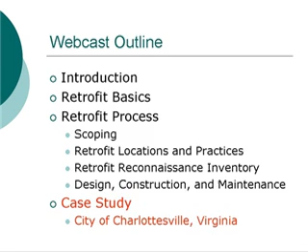It does have some information about pollutant removal performance for different kinds of BMPs, and also some very interesting cost information on how much different BMPs cost on a per-acre basis, so you can make comparisons about costs and benefits of tackling different projects. There's a lot to this manual, and we'll be going through and highlighting some of that for you today.

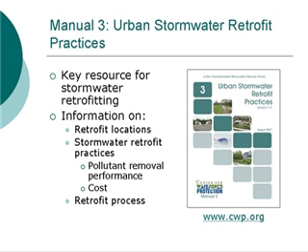You can download it from either of the websites. So one thing before we launch into this, I just wanted to explain in more detail how we see this idea of retrofitting fitting into the post-construction requirement in the Phase 2 stormwater program.

As you know, the Phase 2 program requires MS4s to address stormwater controls on new development and redevelopment, any project that would impact an acre or more of land. On the left you see new development, redevelopment, and then existing development. The regulatory requirements span those first two areas of new development and redevelopment, and of course there is no regulatory requirement for existing development.

The way we in the center look at retrofits, and this is somewhat of a definitional issue, is that we see retrofits spanning both the regulatory side and, if you will, the voluntary side. So retrofits, when we're talking about it today, will be useful in redevelopment situations, which come under the heading of the regulatory program, but will also be useful in existing development.

One of the keys that I think we all need to look at when planning for what we're going to do in an individual MS4 is to really look at what the situations are. Do we have a lot of growth going on? Is it an environment that's already built out? What are the water quality issues? Where are the areas of impervious surface within the watershed? What kind of stormwater controls do we or don't we already have?

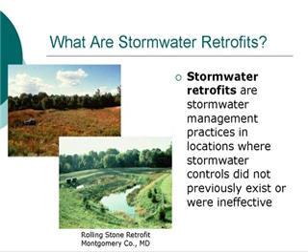So we talked about the definition of a retrofit, and the key question is, why retrofit in the first place? Nikos gave a good introduction to why to undertake retrofitting, to address redevelopment and existing development. But to get a little larger scale, retrofitting is undertaken to address situations where we have ineffective stormwater controls that don't do everything we want them to do - they're not treating water quality, they're not providing channel protection. The great thing about retrofits is they can address those problems caused by ineffective stormwater infrastructure, and help restore a lot of those situations that have occurred because we don't have that infrastructure. We'll talk about a couple of these on the next slides.

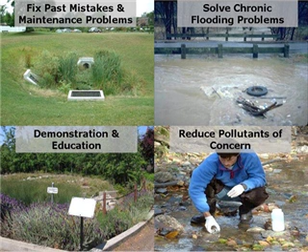Communities have undertaken retrofitting for a number of reasons, primarily to fix past mistakes and maintenance problems. It's a common way to go back and concentrate in particular areas within a municipality or sub-watershed, to find those culverts that might be undersized, stormwater infrastructure that might cause localized flooding, or those chronic BMPs that are a maintenance nightmare.

Communities will also undertake retrofitting to solve chronic flooding problems, tied in with infrastructure, but also addressing particular stream reaches or going into the stream corridor and adding large retrofit practices to retain flood volumes before they pass downstream. Communities like the City of Charlottesville, and Dan's here with us today, have also undertaken retrofitting for demonstration and education reasons, to show the development and redevelopment community how you can use stormwater BMPs on ultra-urban sites and work them in as you're redeveloping sites.

I think a primary one to point out is reducing pollutants of concern. Whether it's to address TMDLs or, here in the Chesapeake Bay area, tributary strategy goals for the Bay, removing things such as nitrogen, phosphorus, and sediment - retrofits can really do a good job at reducing pollutants of concern, both from redevelopment and existing development.

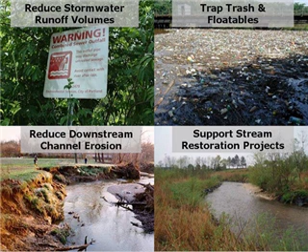We'll move on to a couple other big retrofit reasons, and a nice one to point out is reducing stormwater runoff volumes - both volumes conveyed into the storm drain system, but also into the combined sewer system. Communities like Portland, Oregon, Detroit, Michigan, and Milwaukee, Wisconsin have used stormwater retrofitting through residential downspout disconnection to reduce stormwater runoff volumes into their combined sewer systems and attack those problems.

That's a great point to interject too - EPA sometimes makes rather artificial distinctions between stormwater and CSO cities, but actually many cities have both combined systems and separate systems. A lot of the work we're doing on the landscape really is about the same objective, which is reducing the big volumes of stormwater getting into the system, whether that's a separate system as we focus on, or a combined system that might result in an overflow at some point. But really the work on the land is the same. And that's the great thing about retrofitting - it can help address all of those objectives and problems we have within our watershed.

There's a few others up on your screen. If you're interested in trapping trash and floatables, retrofits can be very effective at doing that. They can also help reduce downstream channel erosion and support stream restoration projects by controlling the hydrology from developed areas upstream of stream restoration corridors.

With all that being said, there's great potential behind stormwater retrofitting, but it's important to point out that it's also challenging and can be expensive. Your required storage volumes or capture volumes, whether for water quality treatment, channel protection, or flood control, can get prohibitively large within developed watersheds, particularly when going after channel protection and flood control. Depending on the amount of development and impervious cover in your watershed, you might need a lot of retrofits - dozens, maybe hundreds - to make a real difference and address those goals. And that's the crux of the problem.

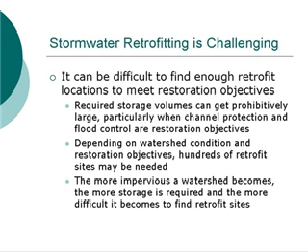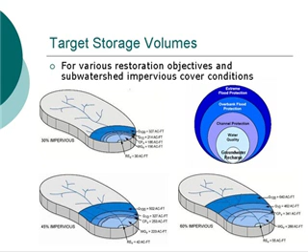What this shows is a simple example, but it shows that as you get more impervious cover within your watershed, it becomes more difficult to retrofit because you have a larger capture volume that you have to capture and treat or otherwise manage. So I think it's an important point that you can go after a lot of these problems within your watersheds, but it can be really difficult to get there.

Continuing on that example, we're looking at that hypothetical watershed where we've got 30% impervious cover, and we're trying to treat the water quality volume. We've had some initial stakeholder meetings, and our watershed was developed without adequate stormwater controls — they don't provide water quality treatment. So we're going to go back in and use retrofitting to capture and treat that water quality volume, setting a reasonable goal of maybe treating 75% of that capture volume, assuming we treat 80% of it with large-scale storage retrofits and 20% with on-site, small-scale retrofits.

You can see on your screen we've got some estimates of how much impervious acreage each of those would treat. Running the numbers, we see that we need about 20 of those big retrofits and over 400 of the small-scale retrofits. So as you can see, that's a lot of retrofits — it can be daunting, but...

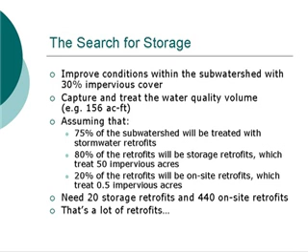Yes, it looks like it could be a very daunting process. But I think the great thing about the retrofit manual and the process we'll talk about today is it lays out a systematic and process-driven approach to identifying and implementing retrofit projects that can address those problems.

And the key is really to use a comprehensive delivery strategy that includes both large-scale and small-scale projects. A lot of stormwater managers make the mistake of thinking that stormwater retrofits involve just those large-scale capital improvement projects. But a comprehensive retrofit program involves not only those, but also some small-scale downspout disconnection type projects, and they can be delivered through a variety of methods, through redevelopment projects, through demonstration and education projects.

There's a lot of different methods that can be used, and the retrofit manual talks about those methods quite a bit. I think one important one to point out is redevelopment — not only on redevelopment sites, but also using stormwater management criteria on redevelopment sites to perhaps trigger other retrofits off-site in a mitigation type approach or a fee-in-lieu program type approach.

Yeah, there can be a whole range of design credits and also, if you will, financial credits, particularly in communities that have stormwater utilities. They can set up the fee structure to give financial credits to homeowners and businesses based on retrofit options, which can spur that kind of change through an incentive program. So, yeah, there's a lot of options for getting this done.

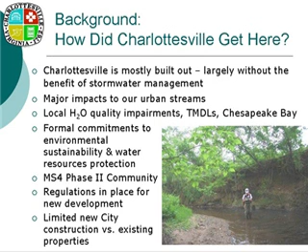Dan, just out of curiosity, what's the source of drinking water for the city of Charlottesville?

We have 2 surface water reservoirs. One is up right in the foothills of the Blue Ridge Mountains, so it's a very pristine source of water, and another is a surface water reservoir where the Rivanna River is impounded. We're going through a very comprehensive water supply process in Charlottesville right now, so those issues are very much on people's minds.

Beyond those historical impacts and our environmental commitments, we do have current regulations in place for new development in the city. For that new development, we're encouraging and incentivizing use of low-impact development and other water quality-based BMPs. When the city has a new construction project, we also pursue those kinds of stormwater management, but really we don't have a lot of new construction that we're actually undertaking.

As a result, we've come to see that the opportunity and importance of installing BMPs as retrofits on existing public lands is going to be the way to address some of these historic impacts, address some of these commitments, address some water quality goals, while at the same time allowing us to demonstrate and promote the types of practices we want to see widely adopted across the city, public and private.

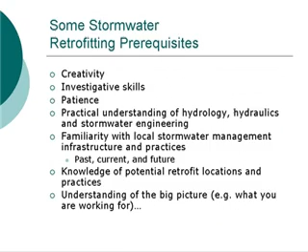Before we dive into the particulars of the process, I want to point out a few prerequisites because retrofitting is a little bit different than designing a new stormwater practice. Instead of working with a clean slate and a nice new greenfield development site, you're going to be working in a heavily developed site with a lot of site constraints. So it's going to require a lot of creativity, investigative skills, patience, and also the technical knowledge about hydrology and hydraulics and stormwater engineering, local stormwater management practices that have been used, knowledge of potential retrofit locations, and an understanding of the big picture.

And I think this is something we should never lose sight of when we undertake any of these efforts. The City of Charlottesville had a great focus for their retrofit study, but whether it's a nice wooded riparian stream corridor, an estuary, a coastal marshland, or a drinking water reservoir, you've got to keep in mind what you're actually working for and the goals you're trying to meet with retrofitting.

So without further ado, we'll dive into step 1 of the process, which is retrofit scoping. I pointed out at the end of Dan's presentation that giving your retrofit program a specific focus and purpose is extremely important. So we'll spend a lot of time on this step this morning, and through retrofit scoping, you're defining that strategy that's going to meet the goals you want to meet in your watershed and really tackle those problems.

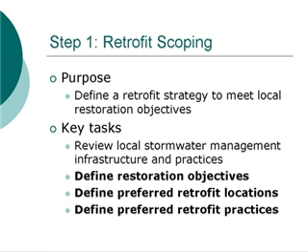There's a few key tasks that are involved. I'm not going to spend time on that first one on your screen, but the last three we're going to talk about in more detail this morning.

First of those tasks is defining your restoration objectives. Again, this is tying your retrofitting into what you're actually working for, answering and solving the problems you're actually trying to address. We have some nice example stormwater retrofitting objectives on the screen, but the key point here is to tie your larger big picture restoration objectives, like reducing pollutants of concern that might be conveyed into a bay or drinking water reservoir, into a specific and measurable retrofitting goal.

So we have a few examples here on the screen of how you could tie big picture restoration objectives into some retrofitting actions. The key is to translate those big picture goals into more specific, measurable goals, and to make sure those goals are realistic as well.

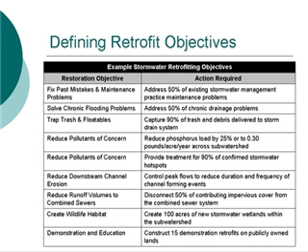Now, everybody noticed you said measurable goals. Very good, Mike, that's right. Yeah, so setting some bars to hit, and not setting them too high that you can't ever jump over them, but giving a real purpose to your retrofitting study.

And I think, while it's nice to look at these hypothetical examples, we should take a good look at what the City of Charlottesville did in defining their retrofit goals and scoping their program out.

Sure, we'll talk about that a little bit more. We talked earlier about the overall objectives of the study that were developed when the idea was hatched, but early in the process, we also came up with some performance goals for the retrofits we'd be searching for, generally like the ones Mike had on his last slide. We really took care to ensure that the specific retrofit performance goals were complementary to and would help achieve the overall study objectives.

The primary goals include pollutant removal, and we chose to focus on local and regional pollutants of concern. Sedimentation has been identified as one of the greatest threats to the health of the Rivanna River watershed where Charlottesville is, and several of our local streams have TMDLs for bacteria. So those were certainly pollutants we were interested in seeing these retrofits address.

Nitrogen and phosphorus are two of the major nutrients being targeted for reductions in Chesapeake Bay restoration efforts, so those are also ones we wanted to look at. For runoff reduction, we wanted retrofits that could achieve overall reductions in stormwater volume, which helps address downstream channel erosion issues, which then gets to your sedimentation problem. So we're trying to look at these things in the context of our local water quality goals and issues.

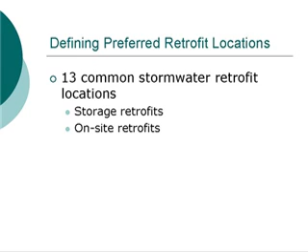So when we talk about storage, we're not trying to imply big ponds only. That might be one of your options, but infiltration into the ground is also a storage option, and we'll talk about a range of those things. So hopefully nobody's confused. We're always trying to find the right terminology and the right way to say things, and sometimes there's a little bit of a force fit with some of these words.

It's true, and again, we're at almost Nikos' favorite diagram. This one only has 6 balls. Changed, that's true, so 6? Yeah, there's a fair amount of graphics effort to produce this one.

So storage retrofits are basically retrofits that capture a large drainage area. These are our big site retrofits, typically capturing on the order of 5 to 500 acres. They typically can address both quality and quantity, channel protection types of criteria. Usually they would be located on public lands.

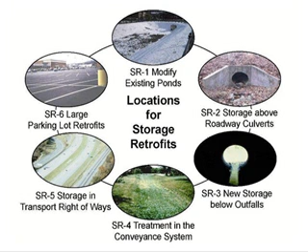The most common types of practices used in these are ponds and wetlands. As far as cost, they're typically moderately cost per acre, and in general they're quite difficult to implement on very highly urbanized watersheds. Some typical ones are described here: existing ponds, very large parking lots within the conveyance system. Again, you're looking for areas where you can capture a quite large drainage area. In a bit, I'm going to highlight a couple different types of practices and locations among these.

Oh, and yeah, now one with 7. How innovative. I think the footballs might be stretched a little bit to accommodate the 7 as well.

The other large group or category of locations of retrofits are on-site retrofits. These practices are typically capturing less than 5 acres; sometimes an individual practice would capture as small as one-tenth of an acre. Typically, the primary goal is for water quality and for groundwater recharge. It's typically hard to accommodate flood control or channel protection goals within these practices.

Very often, not always, but very often, a community will have to look to locations on private property as well as public property. The types of practices are very small scale, typically looking at stormwater filtering types of practices, small infiltration practices, and some low impact development techniques. They're typically more expensive per acre than the storage retrofits, and they can be applied within the ultra-urban setting.

So again, in looking at the specific locations you can use, we're looking at these smaller areas, targeting hotspot operations. This might be, for example, within an individual gas station, individual rooftops, or just looking at small areas of streets.

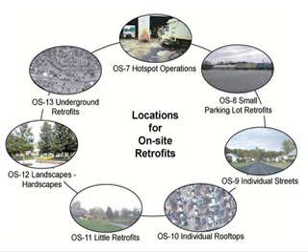Some of those would be particularly good when a site's being redeveloped, so that you can apply those as part of your redevelopment package that you negotiate with the developer. That's a great point.

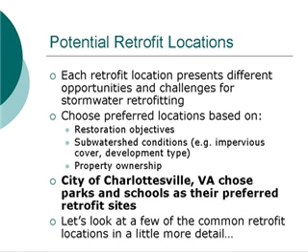When you're trying to decide which locations or which blend of locations to go conduct your retrofit inventory, or to select which types of retrofits you're going to use, you have to consider unique challenges for each one, as well as the overall objectives you're trying to achieve. In Charlottesville, Dan, public ownership was an important criterion used in the initial selection, and that's true for many communities. I wanted to go into a little more detail on some of the specific retrofit locations that can be used.

Within the manual, there's a coding of SR for storage retrofits and OS for on-site retrofits.

One of the most common things to do when you're doing a retrofit inventory is just looking to existing ponds. These are some of the easiest areas to conduct a stormwater retrofit, especially in communities that have had a history of flood control but maybe not water quality.

Some of the strategies you're trying to do within existing ponds often involve increasing the volume of the pond so that you can, for example, accommodate both water quality and channel protection in a pond that had historically only done flood control.

One of the things you do when you go to the pond is look to see if you can perhaps excavate the pond bottom. You'd want the pond bottom to be flat and dry, ideally, to do that, or if perhaps there's room to raise the pond embankment to create more volume within the pond.

Sometimes ponds have done several controls for several different storms, and you can trade storage that is used, for example, for controlling a 2-year storm design, and then change that outlet structure so that you can achieve more goals.

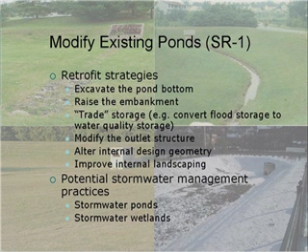Typically these start out as ponds, often perhaps as a dry facility. The end product is a pond or wetland.

I think it's important to point out that's a very common scenario since a lot of our watersheds were developed maybe 20, 30 years ago. Maybe you had flood control, and that's a good opportunity to convert to get water quality treatment in those ponds.

A lot of the ponds, as we talked about in our last webcast on BMP performance, are frankly underperforming BMPs. So there are some things we can do to make them perform better. For instance, taking a dry pond and turning it into a wet pond, or taking a wet pond and turning it into a wetland, or adding trees, or extending the flow paths, doing all sorts of things to give them higher value, not only for water quality, but for habitat and things like that.

Another opportunity within pond retrofits is that you're revisiting a past practice that perhaps just needs some simple maintenance. So you can get two things done at one time when you go to ponds, doing a standard inspection just to see if it needs regular maintenance, if sediment needs to be removed, and at the same time, improve the water quality.

In general, ponds have fewer challenges than other practices. One place where it can be difficult is where the pond barely has enough volume or space to achieve its original design goal. Why don't we move ahead, in the interest of time, and talk about the hotspot one.

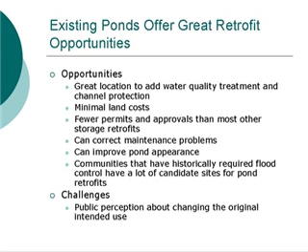Okay, so stormwater hotspots can encompass various land uses within commercial, industrial, sometimes a highway barn, for example, could be a municipal hotspot. These are areas within the watershed that have the highest level of stormwater pollutants.

Typically hydrocarbons, the nurseries pictured here, might have very high nutrient loads. Even if you're able to capture much of the watershed within some of the larger storage retrofits, it's really important to focus on these areas that can include a very significant amount of the pollutant load within the watershed.

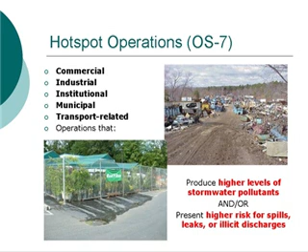One question we get asked a lot is whether we can use LID kinds of concepts that promote infiltration in a hotspot area. That's a very good question. Typically, infiltration is highly restricted within hotspot operations just because of concerns of contaminating the groundwater.

Another piece of information we were talking about before the webcast was, for example, if you use porous pavement, you can end up with an area that if you had an oil spill would be capturing all this oil below ground. However, one application where you could try to do it is if you use a treatment practice prior to that infiltration practice. Sometimes you could even do it with a very large pre-treatment practice, such as an oil grit separator.

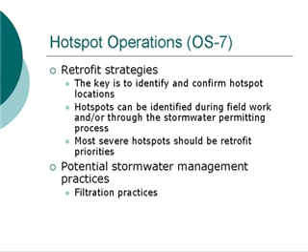In some areas, especially if they're concerned about contaminating a sole source aquifer, they may require complete stormwater treatment via something such as a filter before infiltrating. Yeah, those are all good points. So it's very site-specific, but it's certainly not out of the question.

Again, on hotspot operations, typically the types of practices we mostly would focus on are stormwater filtering practices. A sand filter would be really the classic practice used in a hotspot. Often this can be coupled with pre-treatment types of practices again, such as oil grit separators, which can act to capture material if there's some sort of spill.

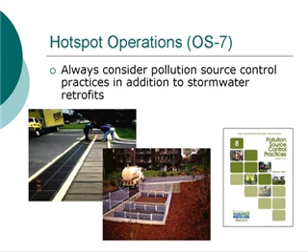One thing I always want to emphasize on these too is that for many hotspots, it's not the land use, but it's the specific operations that happen within that land use that create the pollutant load. There's another manual, Manual 8, that looks very much like Manual 3, the Pollution Source Control Practices Manual, that really goes through and looks at some of the specific practices you can do on hotspots to try to minimize their pollutant potential combined with retrofitting.

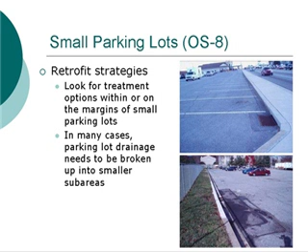Another one of the on-site types of retrofits is small parking lots. Often this would be a mixture of public and private property, and this is the classic place to really implement a lot of the low-impact development types of practices. Within a parking lot, you're typically dividing it up and trying to look for places to implement several smaller practices rather than looking at one large practice.

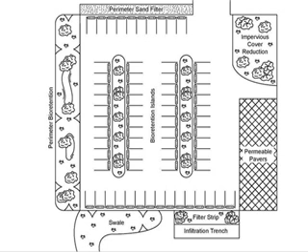In this example, looking to the landscaped islands, maybe they could be used as bioretention, or perhaps we could use bioretention at the perimeter of the site. Sometimes we might use a swale type of practice, or look to the parking lot's overflow parking area and maybe use a permeable pavement there. Sometimes we might even include some kind of a sand filter—in this design, toward the top, there's a perimeter sand filter. So again, you're looking at quite a few different options within the same site often.

Individual rooftops—one of the really important take-home messages here is that rooftops, both commercial and individual, are scattered throughout the watershed, and both present unique challenges. I'll talk a little bit about the specific mechanisms of treating these rooftops, but one of the really important things is the delivery system to make these happen.

Typically, when you're doing rooftop retrofits, it would be asking many individuals to try to do it. Some of the places that have some good programs for this is Portland, Oregon, which has a rooftop disconnection program that includes a combination of financial incentives as well as technical support to help individuals disconnect rooftop runoff.

Some type of rooftop treatment might be required as part of redevelopment in some areas. Nikos has a specific link on this for the Green Infrastructure website - our NPDES Green Infrastructure Initiative, which is on the EPA website at epa.gov/NPDES/GreenInfrastructure, has a bunch of information about green roofs in particular as one possible option for implementing this sort of effective rooftop disconnection.

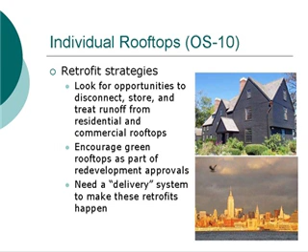That's right. I'd like to look a little more into detail into each of the types. Residential rooftops present a very different type of challenge and strategy than commercial rooftops, or just in general large, flatter rooftops. Residential rooftops typically use very small practices like a rain barrel or a small rain garden, and one of the real things we're looking at is just trying to catch each individual downspout.

Commercial rooftops, on the other hand, often have a larger area draining to each practice you might use, and sometimes they even have an internal drainage system. So you may be looking at something much more structural or a significant undertaking, such as a green rooftop.

Rather than using rain barrels, a very similar type of practice would be to use much larger cisterns that can, in some cases, actually be combined with the irrigation system, or occasionally even used for gray water within the building.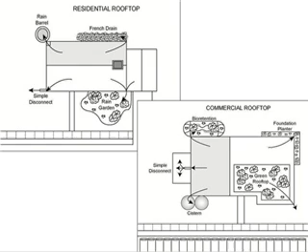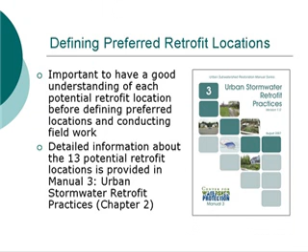As you're going through and trying to decide where you would like to retrofit within the watershed, it's really important to understand what your different retrofit options are, what your restrictions are as far as property ownership, and combine those with trying to make sure you're able to achieve the goals you need for your retrofit option.

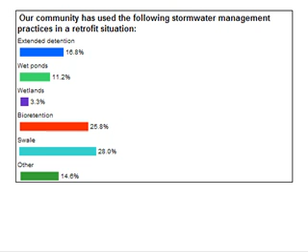Okay, now we've got some better results here. Oh, look, this is interesting - wow, 26 and 28% there for bioretention and swale. That's encouraging, those are among the more effective practices that we see. Extended detention, that kind of dry pond, at about 17%, wet ponds trailing that at 11%. It's kind of like a horse race here. Poor wetlands, only 3.3% - well, that's not so good, since wetlands can really be somewhat more effective than some of the other options. Very interesting poll results there.

So we will continue on now. Deb, so now we're going to talk about how we figure out what the preferred practices are. I guess you all understand which of these practices are since you're responding to the poll question, but using kind of a full suite of practices that are available: within ponds, you can have drier ponds that use extended detention, wet ponds that use a permanent pool, and wetlands.

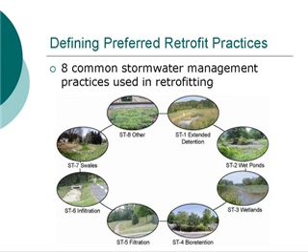That first category - wet ponds, extended detention, wetland - typically work very well when capturing a much larger drainage area. The remainder - bioretention, filtering, infiltration, and swales - are typically applied more with on-site retrofits, or at least for smaller drainage area practices. Other options can include a wide variety of practices, including some pre-treatment types like an oil water separator, or even deep sump catch basins. Also, the whole variety of low-impact development practices can be considered as part of retrofitting.

Okay, I just want to talk a little bit about the ways to choose the practices. A lot of which practices you choose is going to fall out of the locations you're able to do it. So if you've decided that the main thing you want to do is focus on your existing ponds, that's going to lead you toward pond retrofits.

If instead you've decided you want to focus on a bunch of smaller parking lots within the watershed, or look at some on-site kinds of practices, you're going to be looking more toward practices like bioretention, practices of low-impact development. One of the other things you really want to consider as you get more specific is how much do the practices cost?

How are they able to remove pollutants? If you have a goal of reducing the volume of runoff, you might want to look to infiltration practices as well. Another thing that's really important to consider is the long-term maintenance. Is your community going to be able to deal with many small practices, or the maintenance burden of each of these practices? Another part I'll talk about more later in the webcast is other benefits to the community. Is it safe? Is it a safe practice? Does the community view it as a benefit?

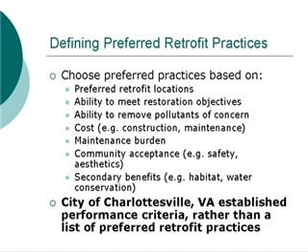Sure. And another thing the manual has, which can be helpful in this process, is Appendix E of the manual has some detailed cost information, both by practice and by location. Appendices B and D have information regarding pollutant removal of the different practices. So that's another way to evaluate each of the different practices.

Chapter 3 outlines the different practice options there are for stormwater retrofits, and this table just shows a little bit to go over what it means. It looks at, for each location, what types of practices are the most applicable, and I'll just go over some of the ones we already talked about.

For SR1, which is existing ponds, the black dots would be the preferred option. So within existing ponds, we're going to be leaning more toward extended detention or wet ponds or wetlands. You can occasionally try to incorporate bioretention or filtering elements within existing ponds. And sometimes, of course, swales and infiltration are a little bit more difficult to incorporate.

Looking at hot spots, the easiest practices to incorporate are typically bioretention and filtering. So you can use this as a screening to say, okay, here's the types of locations I was able to find within my watershed. What are the practices that I'm going to most easily gravitate toward once I have those practices in place?

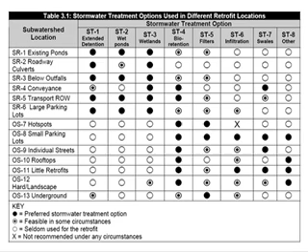And so while you're looking at that, John, why don't we take some questions from the audience? I'll just leave this slide up there for a few seconds. Sure, I imagine we must have some questions now. We have tons of questions.

The first question is for Dan. Jerry asks Dan to identify what was the one issue that convinced your governing body to launch the initial retrofit screening effort. Why did they do it?

Well, I guess it's hard to pick out one in particular. It really is a whole host of issues coming together at the same time, and it gets back to one of the slides I had up earlier about how we got here. It is the fact that, maybe first and foremost, we have a citizenry in Charlottesville that is really interested and engaged in water quality and stormwater issues, and if anything, we're not moving fast enough. So it was really an obvious choice to mix it in with our MS4 permit and keep the ball rolling and the momentum going on these issues.

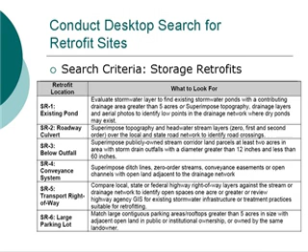So both storage retrofits and on-site retrofits can be searched for on the desktop. I'd just point out that on-site retrofits are usually a little more difficult to identify from the desktop, just because it's hard to tell from aerial photography whether or not you can disconnect a downspout or treat a bit of a parking lot in a bioretention area.

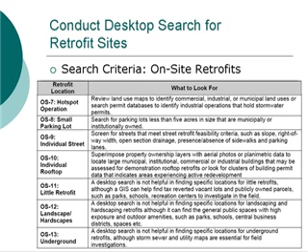Yeah, probably your resolution's not high enough to see that small detail, right? That's right. So what you can do is pick out general areas to go out and get into the field and assess the potential for on-site retrofits. Before you jump out in the field, we recommend preparing some base maps for each of those potential retrofit sites. It really helps a lot when you're out at the site to collect information quickly, particularly for existing conditions.

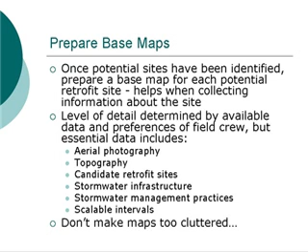Level of detail is really determined by the available data and by the preferences of the field crew, but there's some essential data that you need to include on the base maps. It can be tempting to add a lot more data that might help in your site assessment, maybe soils information, property ownership, land use, but that stuff tends to clutter up your map, making it less useful to the field crews out at the site.

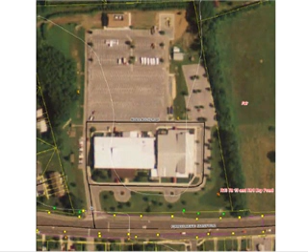On your screen now is an example of a nice, clean, simple base map. Notice we still have some useful layers on there: topo, aerial photo, storm drain infrastructure and stormwater infrastructure. This leaves a lot of room for notes and sketching. I think this is a good example of how to prepare your base maps.

Now we're going to dive into, once you've done your scoping and picked out locations that are going to allow you to potentially meet your retrofit objectives most effectively, you're actually going to get out in the field and assess those retrofit sites. This is where the fun really comes in. You'll collect all the information you need to determine whether or not a retrofit practice can be installed at the site, and you're collecting that information to create an initial concept design and some sketches and descriptions.

Materials that you need are the field forms, the RRI forms - retrofit reconnaissance inventory forms, which we've included a blank copy of in your resource packet - the retrofit field guide, authorization letters from the city, local government, or regional authority explaining to property owners what you're doing out there, especially if you're going on private property, contact numbers in case of emergency, and then photo ID and business cards.

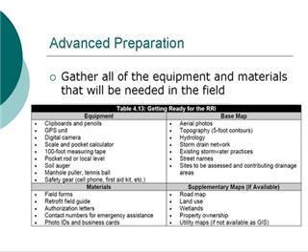Some of you may be wondering exactly what the field guide is. Basically, that's a simplified guide to provide field crews with some guidance on conducting retrofitting in a consistent manner. You might have multiple crews going out, so that field guide can help them assess sites in similar ways. We've included a template for that field guide in the additional resources for this webcast.

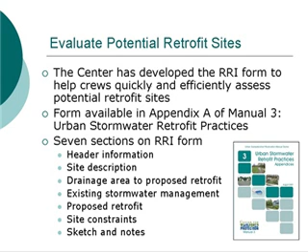So now you're all set. You're finally ready to go out in the field and spend some time out there, take pictures, make sketches. We've developed a pretty nice retrofit reconnaissance inventory form to help your field crews quickly and efficiently assess retrofit sites and collect all the information that you need. Again, we've included that form, a blank copy, in your resources list.

Now, this is another common feature of all Center products - a form with a strange little acronym at the top. We love the acronyms. We added to the word soup that's already out there in the stormwater world: RRI, the Retrofit Reconnaissance Inventory.

Basically the idea is to use both the form and the base map to collect the important information you need to make a call on whether or not you can actually do a retrofit at that site. While we can't go into a lot of detail about what you need to look for at every potential location, I'll spend a little time on existing ponds, since Deb talked about those this morning. Basically, you're going to start at the potential location of your retrofit.

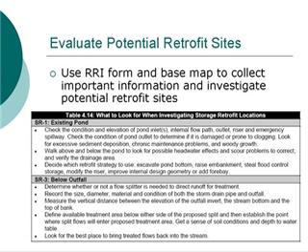It always kills you to spend time investigating the contributing drainage area or the upstream and downstream stormwater infrastructure, just to find a sanitary sewer line a couple feet below the surface when you were planning to excavate that pond to create additional storage. So always check the potential site of your retrofit first, then move up or downstream to determine whether or not you can conduct a retrofit there.

Additional guidance on each of those storage and on-site retrofit locations is provided in the retrofit manual, so you can go back and check those out. Really, without going into a lot of detail, I want to give you just the big picture idea of what the RRI is.

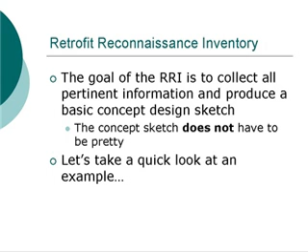That's collecting the information you need to be able to make the call on whether you can do a retrofit or not, and collecting the information you need to produce a basic concept sketch of your retrofit and a short description of it. It doesn't necessarily have to be pretty, and we're going to walk through a quick example of a completed RRI form on these next few slides.

There's room for a site description and proposed retrofit location—what exactly are you looking at there? Then on the bottom of page 1, a description of the drainage area and existing stormwater management. This is where you investigate your contributing drainage area and make a call on how big it is. You might have to do that through mapping back in the office, like Dan and the city of Charlottesville did, or for on-site retrofits, often you can't use maps or GIS data because the resolution isn't good enough, so you have to walk the site to delineate your drainage areas. Basically, it's a description of what's going on with both infrastructure and your drainage area.

Page 2 of the form moves into the proposed retrofit. There's room to describe what your retrofit is, what treatment option it is, and a couple of checks on the realism of your concept. There's also room to do computations on capture volumes, if you want to treat water quality or do channel protection. You're looking at a target capture volume and an actual available capture volume at your site, so the key is to match that available capture volume with your target.

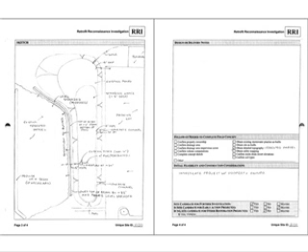The last part of the form, pages 3 and 4, provide room for your sketch. I like to use the sketch just for the proposed conditions, because it often gets cluttered if you try to draw both existing and proposed conditions—I like to concentrate just on what the retrofit will ultimately be. Here you see a sketch of a proposed wet pond retrofit, and page 4 provides room for notes and some initial calls on whether the project makes sense, down at the bottom of page 4.

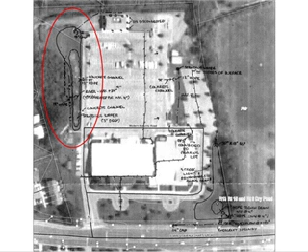Our next slide is going to show a little bit more detail about that concept sketch. It doesn't have to be pretty, but it does have to convey the basic ideas behind your retrofit: what excavation's needed, how stormwater will be conveyed into your practice, what the outlet structure looks like, or whether it's an infiltration basin.

Usually just a plan view is needed. You might also need to sketch a profile view if you're doing a filter practice, showing what media you'd use, or if elevations really make a difference at the site. Photographs also help document your proposed retrofit and existing condition.

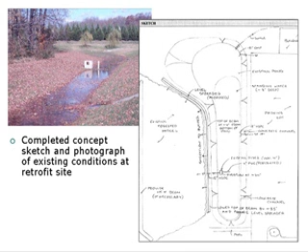I know Dan used the retrofit form extensively in the city of Charlottesville, and I think found it pretty useful. Yeah, I'd say we definitely did.

To talk a little about the field work that happened, as I mentioned before, we had prioritized sites and trimmed down the overall list to a subset of 24 for field work, which we evaluated over the course of 3 days.

The field teams were led by a center staff person who had done retrofitting exercises before and had the experience. The teams included other center staff, but also included city staff.

We really wanted to tag along and participate for a few reasons. We wanted to learn the process so we could replicate it on our own in the future. We also wanted to see and gain as much insight into the potential retrofits as possible as they were being diagnosed.

We also wanted to be there to provide any historic or current knowledge about the properties, whether ongoing master plans or any programming conflicts that a retrofit might run into.

We had detailed field maps, the center's RRI form, and we were using the methodology from the center's new manual.

To tie back to our MS4 program, when we were out there we were also conscious of addressing a piece of MCM3, illicit discharge detection and elimination. During field visits we had our eyes open for any suspicious or illicit discharges coming from public properties, which we're happy to say we didn't find, or from private properties - we actually did find one from a private property, and we were able to address that.

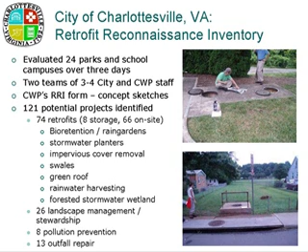Dan has already alluded to this, but we're going to jump now into compiling an inventory of possible sites here, which is step 4. Deb, you were going to talk about how this connects as the next step in the process. Sure. So Mike just went through and explained the process of going out into the field.

The step of compiling is just the process of taking the data and the designs you made in the field and compiling those into something that all the field crews can understand and that you can convey to other people. One of the most important things when you compile the retrofits is to take the designs that seem most promising and develop them into concept designs.

Typically this would be about a 30% design, meaning your sketches are readable to other people, with all the information you need as far as whether you have enough head to construct the practice, the exact details of what the practice is, and how stormwater will be conveyed easily understood. These will not be construction documents, but will bring it to that next design level.

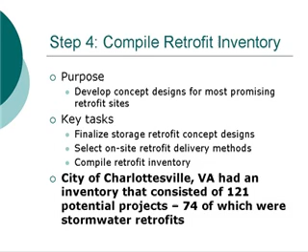And another thing you're going to want to produce as part of that is graphics that help other people understand the location and types of practices that will be proposed as part of the stormwater retrofit inventory.

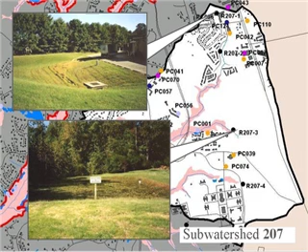And Dan, what types of graphics did you all produce as part of yours? Well, in addition to the study itself, there was a set of information compiled for each of the sites that we visited.

That set of information included a summary sheet of all the retrofit possibilities and other observations noted there, also a map which visually depicted where those particular opportunities were. There was also quite a bit of analysis done on pollutant removal, and a copy of the RRI form was also included.

And importantly, we also received all of the GIS data. Mike touched on this earlier. This included our subwatersheds, our drainage areas, and all the impervious cover digitizing. So we had a database of everything that was identified, and we'll use it as a tracking mechanism now and in the future as we put in a retrofit or implement a management practice, going into GIS to update it and gauge our progress over time.

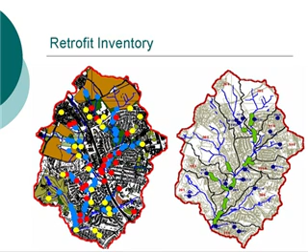Another important thing to do is to display it visually as a watershed map. It helps you understand which reaches of stream, which sub-watersheds you're impacting.

The next step in the retrofit inventory is ranking your potential retrofits. So you've developed what you think are potential retrofits as a result of your field work. Now you need to decide which are your best projects. This step is basically about how feasible and cost-effective these practices are.

And again, I talked about dollars per square foot of impervious cover treated, for example, and just feasibility in terms of what impacts they might have on the neighborhood. An important part of this ranking process is to consult with the neighborhood, especially if these retrofits will directly or indirectly impact somebody's property or even parks that people use.

It's good to first educate people about what you're doing, and also try to gather real information about how they feel about the different practices, and the types of watershed goals they're interested in.

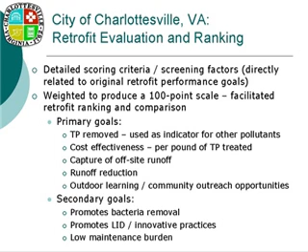We didn't rank the more stewardship activities. That doesn't mean we're not going to do them, but they can be incorporated into ongoing management plans.

After they were all ranked, we sat down with the center and reviewed the ranked projects and discussed ones we wanted to take to the next level, to the design phase. We discussed how they were ranked, and also other things, such as wanting representation of different types of BMPs, making sure parks and schools were represented, and looking at implementation opportunities through master plans and CIP issues. Also things like public safety, permitting, and utility conflicts. Just some good common sense and a gut check also plays into this—you can't be completely bound by your ranking process.

And Dan, how did you find the ranking process turned out once you really scrubbed it? Well, after we went through and looked at all those things beyond just the hard numbers, we still ended up choosing ones that were in probably the top quartile of the ranking for what would move forward. So it kind of validated the whole process and the factors and goals we had looked at.

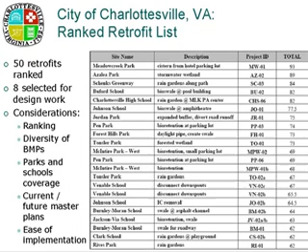In the end, we ended up with 8 that were selected for design work. So we have this prioritized list, and we'll go back to that and use it as a guide beyond just selecting these first 8. But again, it's really just a list. You still have to have professional judgment, funding opportunities, and broader city goals and initiatives are going to play into which ones are implemented in the future.

Okay, and just in the interest of time, Mike, let's run through these last 3 and get to some questions. Greg's or Deb or whoever's going to lead on this one. We've got 3 steps left that we need to cover.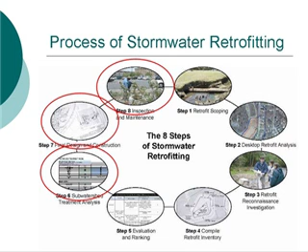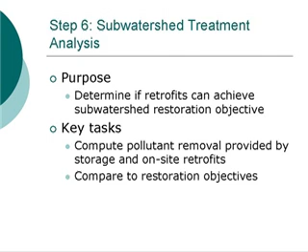Sure, I'll go through these very quickly. Step 6 is an important one in terms of validating or determining how far you got toward your original goals. Often your goal might be to reduce runoff volume within a watershed or to reduce phosphorus load by a certain amount or percentage. What this does is allow you to go through and calculate how much you achieved by doing the different practices. Yeah, and that's very important in keeping with that connection with the water quality goals we set up in the first place. That's right, those measurable goals we set up first—this is a check on those.

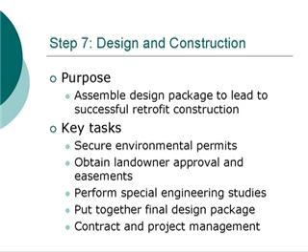Step 7 is design and construction. This would be taking those designs that you've maybe brought to a 30% concept design, or a conceptual design with your top few, and bringing those through design and construction. There's still some specific analyses that need to be done, and a lot more detail in the drawings to make those design drawings. It's an important part of this. It doesn't necessarily have to be the people who originally conducted the retrofit inventory, but there should be some involvement between the designers and the construction, especially because in the retrofit situation there are often tricky types of practices, maybe flow splitters, unusual practices that get incorporated. So the construction is going to be a very important part of that.

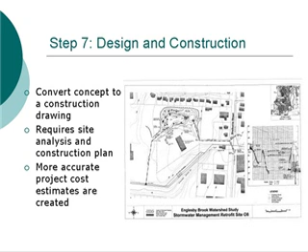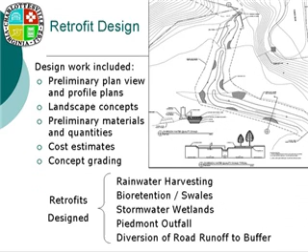Dan, I don't know if you could talk about the details within Charlottesville. Just to touch on quickly some of the projects that were taken to design for Charlottesville, we had some rainwater harvesting projects, a couple bioretention and bioswale projects, and a stormwater wetland was designed. A Piedmont outfall is a term we came up with in collaboration with the center—a typical design meant to be applied and customized to a site where you need an outfall that needs stabilization or repair, using a step pool treatment cell process. Another was a typical design for runoff diversion, diverting runoff from an untreated area, such as a roadway, to a bioretention or buffer area.

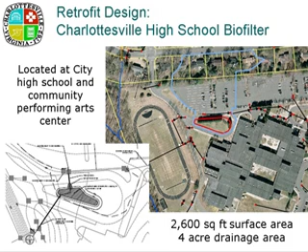One of the sites where a couple projects were identified was our Charlottesville High School and adjacent Performing Arts Center. A 2,600 square foot biofilter will be put in, treating runoff from 4 acres, over 1.5 acres of which is impervious surface. It's important to note this site has no current stormwater management at all. In conjunction with that, a rather large rainwater harvesting system will be installed, collecting runoff from about 22,000 square feet of the Performing Arts Center. When you run the numbers, you can quickly arrive at a hefty sum of stormwater—over 500,000 gallons that we theoretically can capture, and the good thing is we can use it right there on site to replace a potable treated water source.

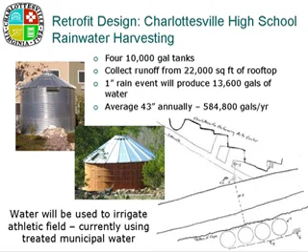So the retrofit projects that we identified in this study really can be seen as an important step in the formation of this retrofit culture in the city. It's hoped that these projects can create a spark that leads to ongoing retrofit activities, not only on public land, but on private land as well.

The steps that were taken to design are our highest priority. We have every intention of installing many more of these retrofits in the years to come. And this effort ties into a broader water resources protection program we're pursuing in the city.

One of the components of that program will provide funding for these retrofits. This program is also envisioned to be funded mainly through a stormwater utility fee, so there's going to be opportunities to include incentives for private property owners to install retrofits on their own properties as well.

We'll also look to incorporate these retrofits into master planning and renovation efforts, try to pull in the private sector, possibly in a fee in lieu program, as Mike talked about earlier in the presentation, which again would tie back to our MS4 permit and MCM5 that Nikos talked about earlier, post-construction.

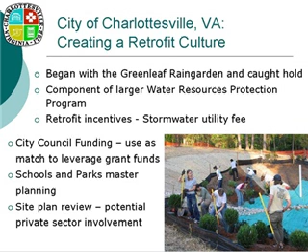So in these ways, we really hope this retrofit culture can firmly take hold, and over time we'll see some real community benefits and some real and meaningful improvements in water quality at the sub-watershed scale as well.

Just to kind of wrap things up, a few key points that I'd like to emphasize and leave you all with: in order to realize the best results from your retrofits, consider them strategically and methodically, and tailor them to meet your sub-watershed's particular needs.

Having a study like we have is going to be a great tool in years to come for retrofit planning. I would also say use your retrofits as demonstration projects where you can. Inspire and encourage private property owners to install them.

By doing this, what you also do is you increase the local knowledge base of stormwater management in your area, because the more familiar, understood, and tangible these kinds of projects are, the more they'll be implemented. This ties in again to involving and educating the public about your projects. The more they're involved, the greater chance for long-term success of these projects, I think is pretty fair to say.

In developed sub-watersheds like Charlottesville, installing retrofits has been identified as a really essential component of a successful watershed restoration and rehabilitation initiative. And we're also looking at this in the overall context of environmental sustainability in the city.

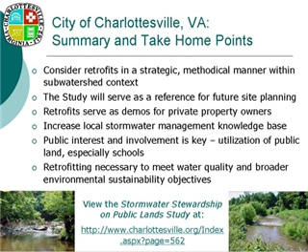Great, the next question actually is probably either for Mike or Nikos, but Ellen from Boston asks, have any communities implemented a stormwater retrofitting program because of requirements in their MS4 permit? Have you run across any MS4 permits that require retrofitting? Well, again, I guess this gets a little bit to that definitional question.

But for me, when we talk about redevelopment of a site, we're also talking about retrofitting it to make it work better, and yes, that is part of the MS4 requirements. Just to clarify in case anybody's confused, this manual is not required. This is guidance to help you meet that overall objective when you have redevelopment sites that are an acre or bigger, so they're more stormwater friendly once that redevelopment process is done. Yeah, Nikos, I think that's the right answer. Remember our definition of retrofit: that's where a stormwater management practice is installed where there weren't any controls, or where those controls didn't do everything we wanted them to do in the first place. So that can be on redevelopment sites which are covered by the MS4 permit.

Now, it's fair to say, too, that there are some communities out there that are requiring some kind of retrofits on existing development. We gave the example before about the downspout disconnection programs, and so those would apply to houses and buildings that are already there. That wouldn't be part of the NPDES requirements, but that's something that the community is trying to do on its own.

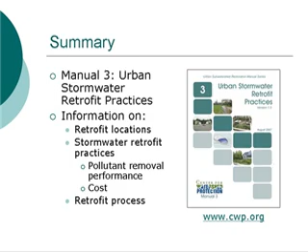Okay, the next question is Thomas from Florida, and I'll open this up to anybody. He asks, when looking at small areas and on private property, what are some of the legal mechanisms used to ensure long-term O&M?

Well, I guess there's a few different options. Occasionally, the practice itself can be dedicated to whomever the municipality is, and that municipality would in effect own it. The other is through a formal maintenance agreement between the property owner and the municipality. Those are the kind of two most common ways done.

I think a lot of the downspout disconnection programs that are out there that have done these individual on-site practices on residential sites have used pretty much like a waiver that the property owner will sign that says, I disconnected my downspout to this practice voluntarily, and I agree to maintain it in a safe condition over time. They'll have inspection staff that, well, they might not get to every site every year, will go out there to make sure that things are looking good, and they will provide technical support as well to property owners that might want to reconnect their downspouts or maybe get rid of that rain garden that was put in. So they'll help out along the way, but the simple answer is, through the waiver and maintenance agreement.

Okay, next question is Ken from California. He asks, when talking about bang for the buck, cost effectiveness as part of implementation, how do you compare some of the on-site versus storage retrofit opportunities in regards to that cost and scale, in terms of bang for the buck?